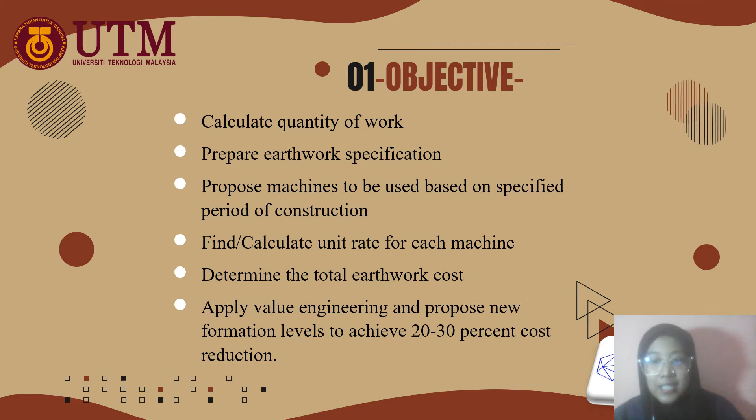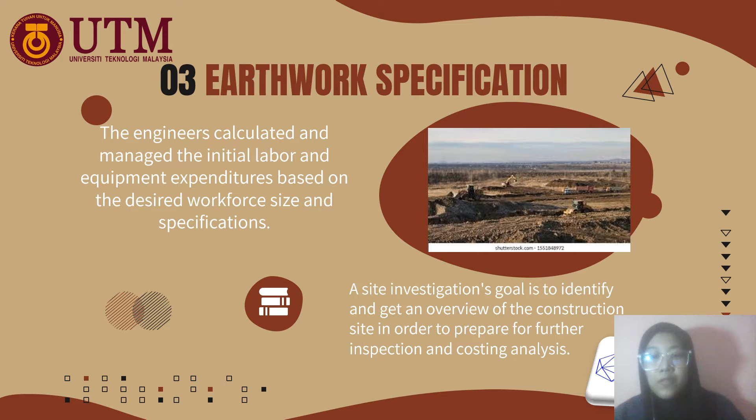Third, we look at the earthwork specification. The engineers calculate and manage the initial labor and equipment expenditure based on the desired workforce size and specification. A site investigation's goal is to identify and get an overview of the construction site in order to prepare for further inspection and costing analysis.

First, earthwork. Site clearing. The site clearing process, including grubbing, scrubbing, demolishing existing structures, and removing the topsoil, trees and vegetation, and other obstacles present on the site, is taken part by part according to the zones provided in the drawing. All the disposal material is removed to the specific location approved by the SO.

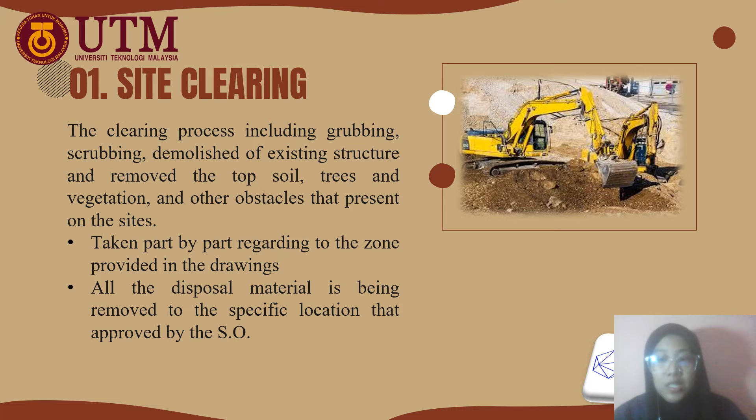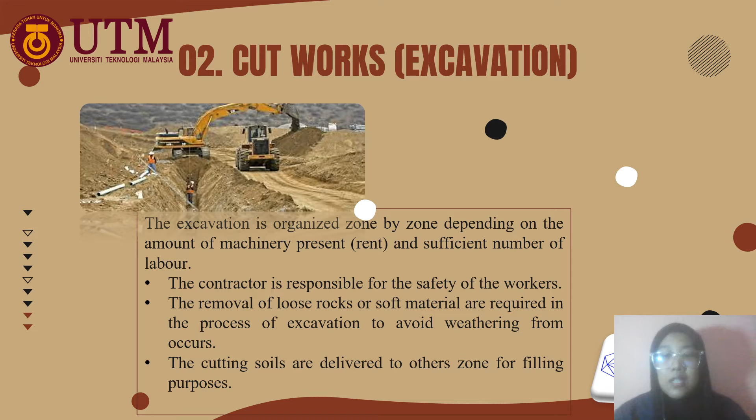Second, cut work excavation. The excavation is organized zone by zone depending on the amount of machinery present and a sufficient number of labor. The contractor is responsible for the safety of the workers. The removal of loose rocks or soft material is required in the process of excavation to avoid weathering from occurring. The cut soils are delivered to other zones for filling purposes.

Third, removing topsoil. To ensure that the project stays within the designated space, I outline the topsoil areas that need to be removed on the building site. It can also assist in determining the amount of topsoil that has to be removed. The officer must inspect the proper machinery and labor to ensure that the task is under control and can be done in a short amount of time with no complication.

Every piece of the proposed level's topsoil must be removed by at least 150 millimeters. The removal of the topsoil is necessary in order to reduce the soil's porosity and water availability.

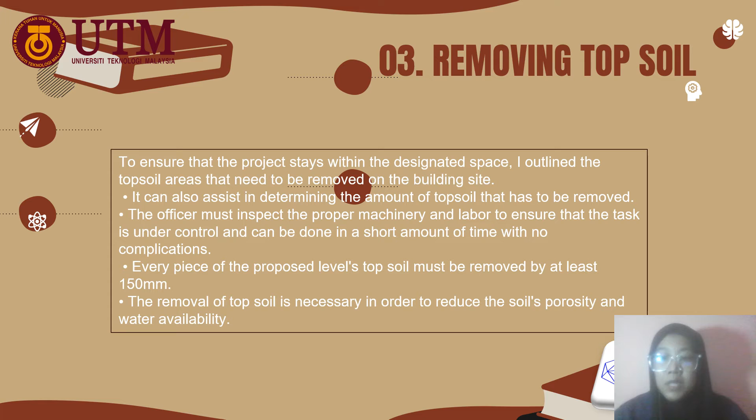Number 4 is inspection. The contractor must report to the SO once the excavation work is complete. After excavation work is finished, the SO is responsible for inspecting and choosing whether or not to install the concrete.

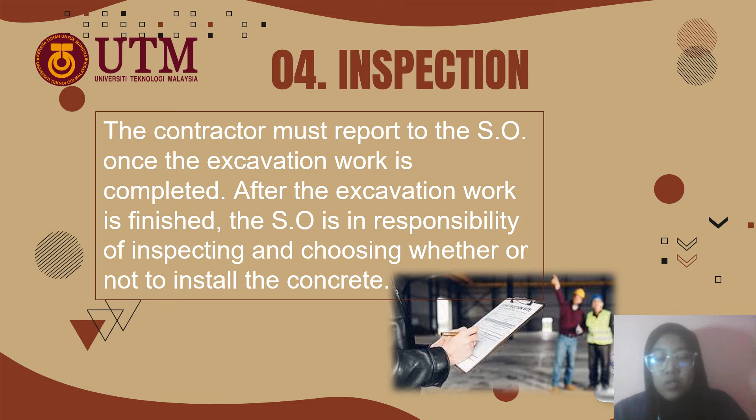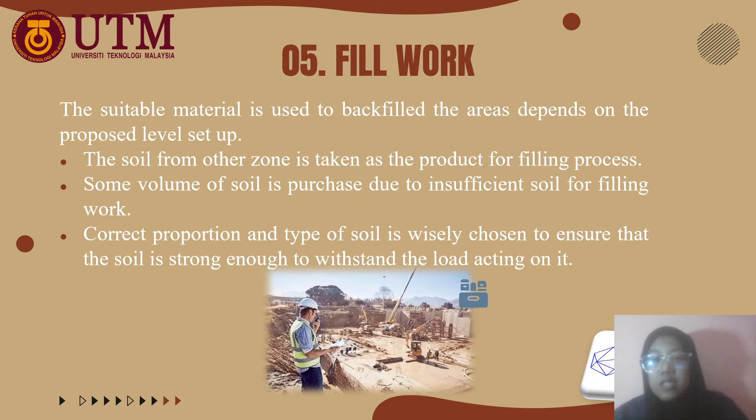Number 5. Fill work. The suitable material is used to backfill the areas depending on the proposed level setup. The soil from other zones is taken as the product for the filling process. Some volume of soil is purchased due to insufficient soil for filling work. The correct proportion and type of soil is wisely chosen to ensure that the soil is strong enough to withstand the load acting on it.

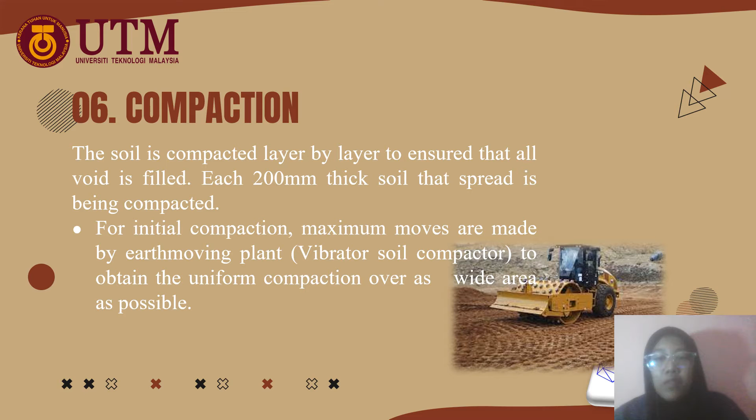Number 6 is compaction. The soil is compacted layer by layer to ensure that all of the voids are filled. Each 200 mm thick soil layer that is spread is compacted. For initial compaction, maximum moves are made by the earth-moving plant vibratory soil compactor to obtain uniform compaction over as wide an area as possible.

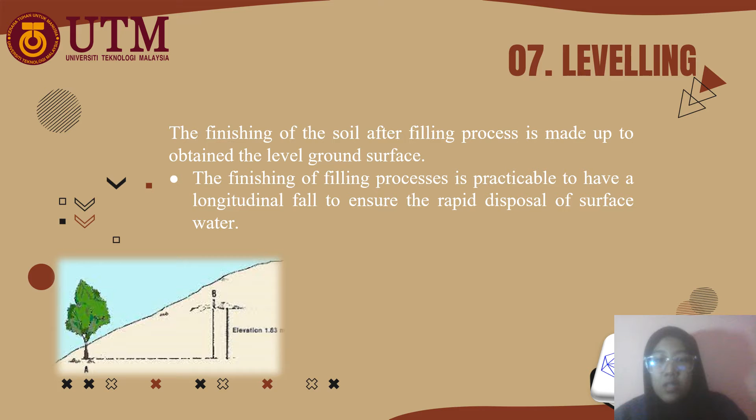Next is leveling. The finishing of the soil after the filling process is made to obtain the level ground surface. The finishing of the filling process should have a longitudinal fall to ensure the rapid disposal of surface water.

8. Protection and maintenance of earthwork. The contractor is responsible for all earthwork protection and upkeep, particularly against the negative effect of water entering the work through rainfall, runoff, springs, or rivers. Failure to do so will result in damage to the final work.

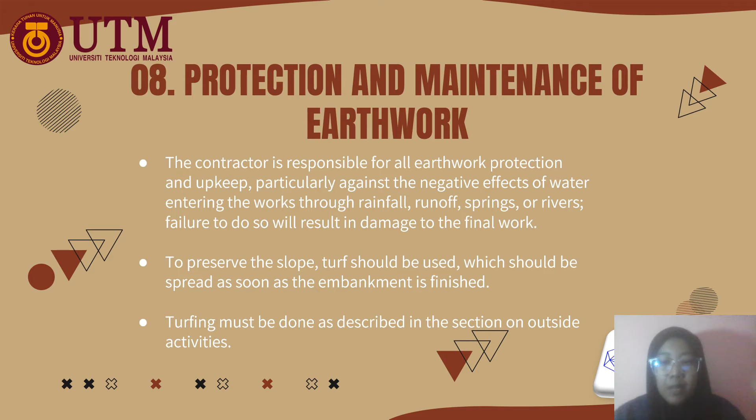To preserve the slope, turf should be used, which should be spread as soon as the embankment is finished. Turfing must be done as described in the section on outside activities. Number 4, we can all see the machineries that we use, and the project's build-up rate and BQ will be calculated using all this data.

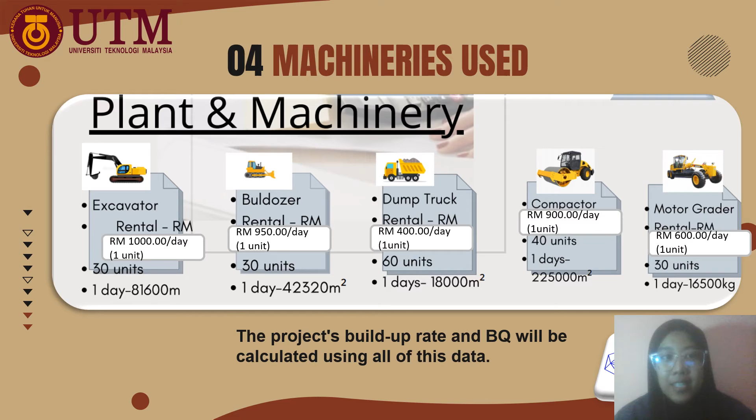Now, the earthwork calculation. First is site clearing or tree removal calculation. Our project's area is 148,489.35 meters squared that has 2,300 trees. We assume every 10,000 meters squared has 150 trees. Based on the ability of the machinery, the machinery will remove 10 trees per day. Total time taken for site clearing and tree removal will take 23 days.

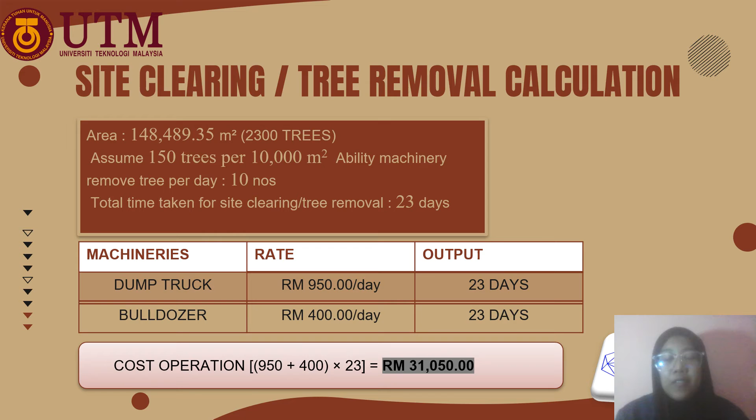Here we use a dump truck that is rated at RM 950 per day, and the bulldozer is rated at RM 400 per day, and we multiply by 23 and get the operation cost of RM 31,050. To cut the trees, we use a chainsaw, and to use the chainsaw we must get labor. The labor rate per day is RM 60, and the chainsaw rate is 360 per day.

To calculate the cost of one tree, labor cost plus equipment per number of trees, and to find the cost for 2,300 trees, we multiply with the price that we get for one tree, and next we get the total cost of this earthwork removal process.

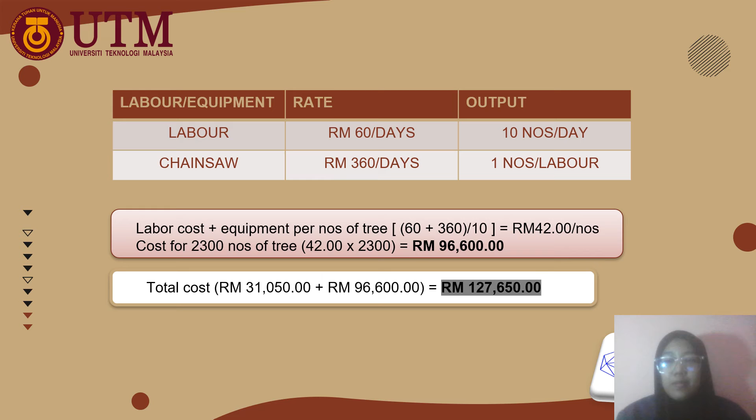Now we look at the calculation for topsoil stripping. The area we get is 511,539.4 meters squared, and volume for cut we get 543,047 meters cube. We use machinery, a bulldozer and dump truck. The rate for the bulldozer is 950 per day, and for the dump truck we get a rate of 400 per day. We calculate the required cost, and then we look for the cost for the volume of cut.

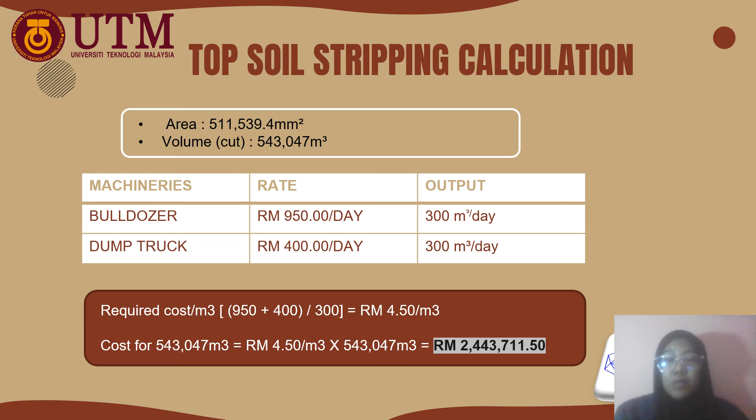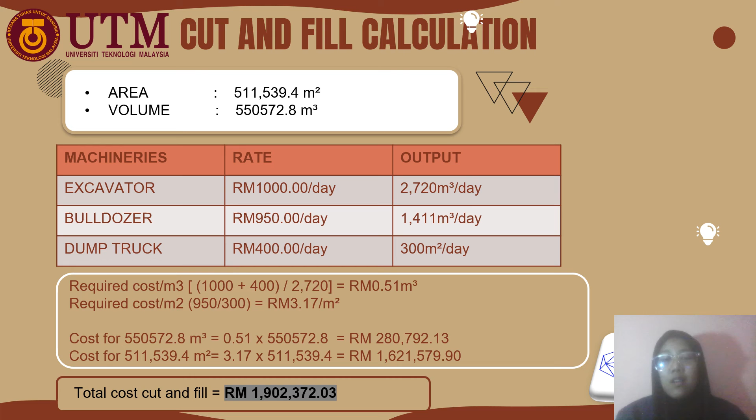And next, we calculate the cut and fill. Same, we get the area 511,539.4 meters squared, and volume is 550,572.8 meters cube. And here we use an excavator, bulldozer and dump truck. The rate for the excavator is 1,000 ringgit per day, bulldozer 950 per day, and dump truck 400 ringgit per day. We calculate the required cost per meter cube and per meter square, and then we look at the cost for area and volume, and then we get the total cut and fill.

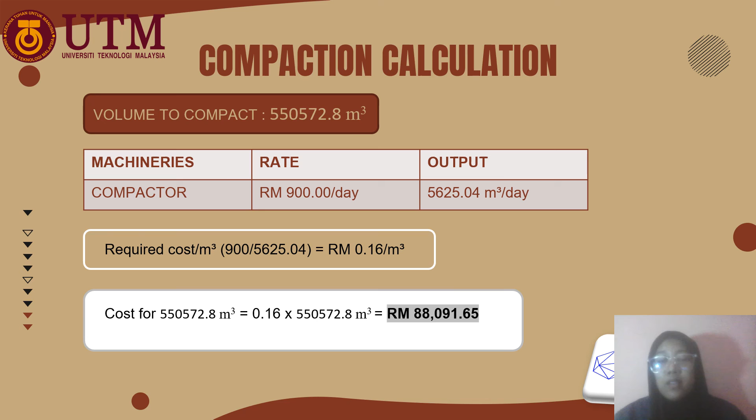Now we calculate the compaction. Volume to compact is 550,572.8 meters cube, and we use the compactor. The rate of the compactor is 900 ringgit per day. For required cost, the rate is divided by the output, and we get the cost for volume to compact of RM 88,091.65.

Now we get the total cost for the earthwork calculation. We total the site clearing, topsoil stripping, cut and fill, and compaction. In total we get RM 4,561,825.18. And we add 20% profit and get RM 5,474,190.22. Therefore, the rate for 1 meter cube of earthwork is the total cost divided by 550,572.8 meters cube, and we get 9 ringgit and 94 cents for 1 meter cube.

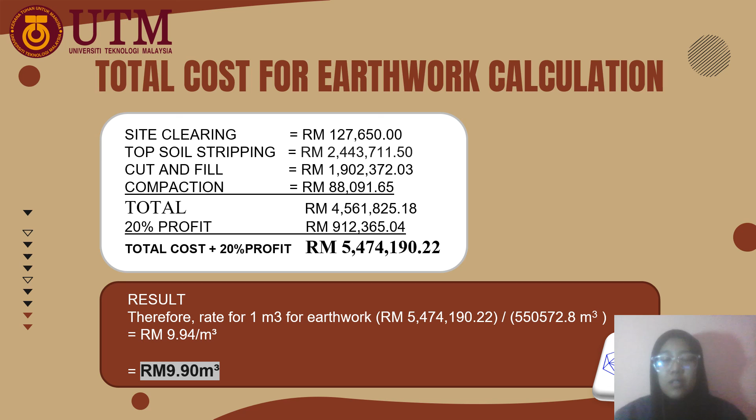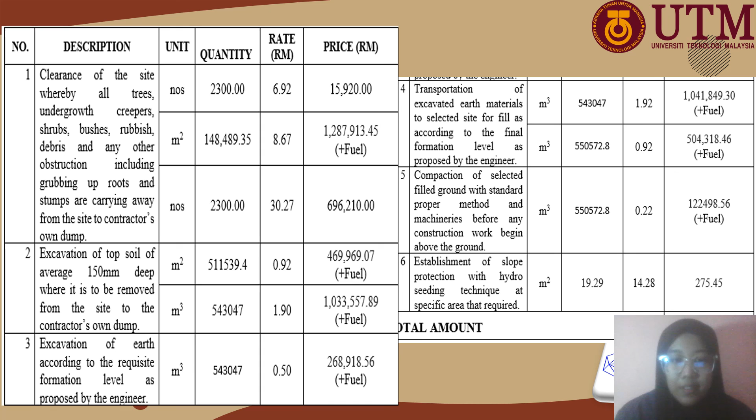Okay, the last part is the bill of quantity, BOQ. After doing the BOQ, I get the total amount of BOQ is 5,441,430 ringgit and 74 cents. From what I did, value engineering and value analysis are organized efforts with the aim of overall cost reduction without affecting the quality and performance of the product or service, thus ensuring value for money.

Application of common sense, logical and lateral thinking, willingness to experiment and innovate, and also reasonable knowledge of the subject matter are basic requirements of value engineering. The best results are obtained when it is teamwork with a multidisciplinary group drawn from various departments.